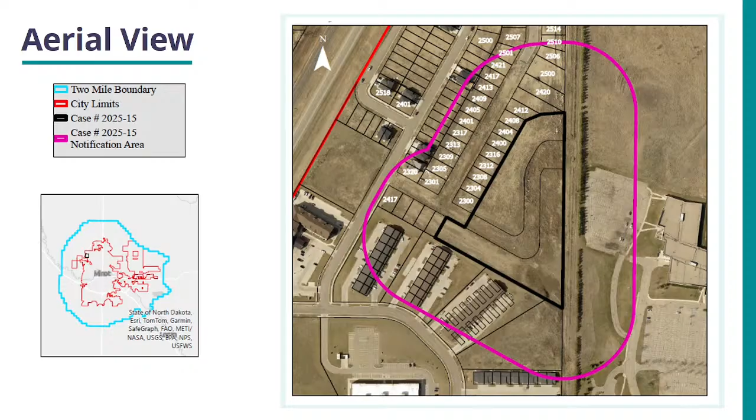Chairman Offerdahl, members of the Planning Commission. As you can see here, we have the property bound in black with the 300-foot notification buffer shown in pink. The subject property is located northwest Minot, west of the North High School. They are requesting an amendment to the PUD plan. The letter of intent can be found in the staff's written report. The proposed layout changes density to single-family homes, and they are requesting the lot alignment amendment to the PUD, as you can see on this map.

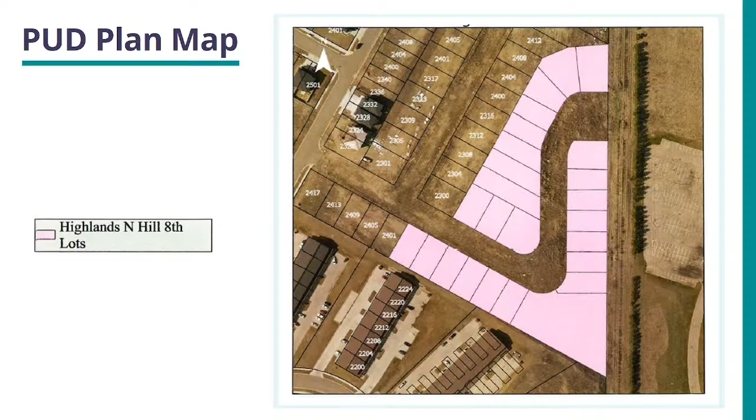The current zoning of the property is R2, two-family residential, with a PUD overlay. Any future development would have to conform to the amended PUD plan. The subject property is designated as urban residential on our future land use map. Adjacent districts are general, commercial, public, and institutional.

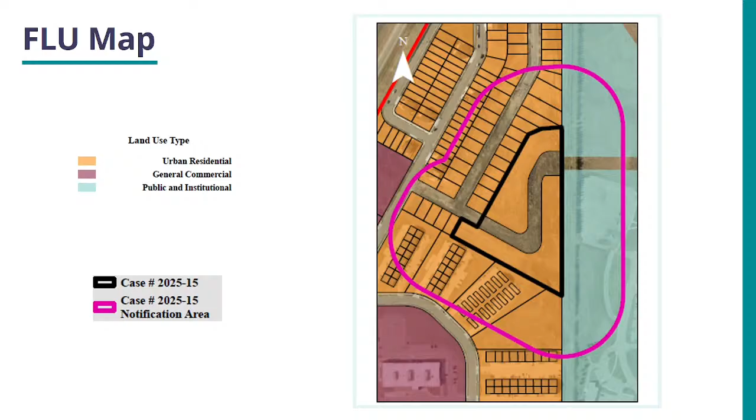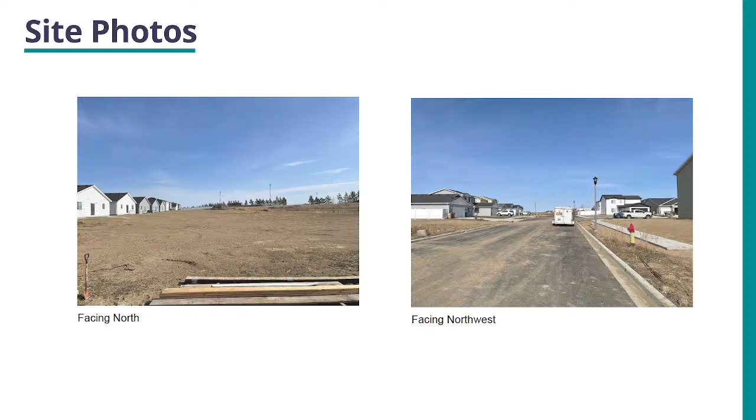Here we have some photos of the property. The one on the left is facing north; these are the vacant lots to be built. The photo on the right is facing northwest, down 23rd Avenue. The photo on the left is facing southwest towards, I believe, their townhome development just to the south, and the photo on the right is facing east towards the new North High School.

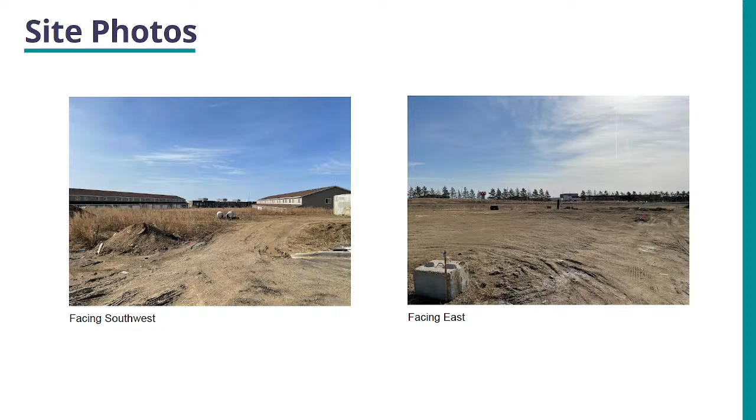Here is staff finding of fact, and it can be found in the staff's written report. Planning Commission has the authority to hear this case and provide a recommendation to City Council on whether to approve the PUD amendment, with or without conditions.

I'd like to let you know that staff recommendations have changed. As you will note in the next application, a portion of it has been withdrawn. Negotiations have been ongoing in this, so staff recommendations tonight do differ from the recommendations you were provided in the staff report. That's because things have changed since the staff report was written.

So staff recommendations as of now are: staff recommends Planning Commission adopt the staff finding of fact and recommend approval to the City Council for an amendment to the PUD overlay planned unit development plan on file at the city, as outlined in Exhibit 3 alternative. That is the sheet that John Van Dyke passed out prior to the meeting. Included in this recommendation is for the City Council to direct engineering to work with the developer to facilitate a reduction in street width by a minimum of 3 feet.

So if you take a look at that alternative, what it outlines is the changes to the PUD that would allow them to go forward with construction of the multi-use path and then be a pilot for a program that would look at street width reductions within subdivisions. So they'd build a narrower road and then have additional pedestrian infrastructure.

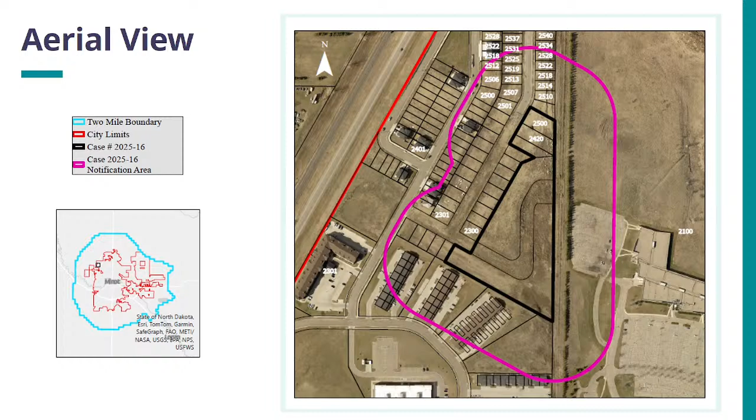As you can see, the subject property is bound in black. It's important to note that the 3 lots to the north would no longer be considered part of this application, as they were tied to the easement vacation, and that application has been withdrawn. So at this point, we're just looking at a preliminary plat for the 2 large lots with unassigned addresses. You can also see the 300-foot notification boundary in pink.

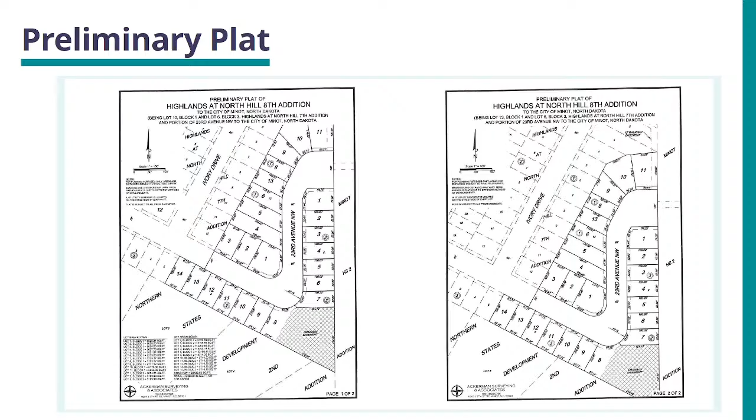Here is the preliminary plat for Highlands at North Hill 8th Addition. The property is currently zoned R2, two-family residential with a PUD overlay, and the surrounding area is zoned C2 and public.

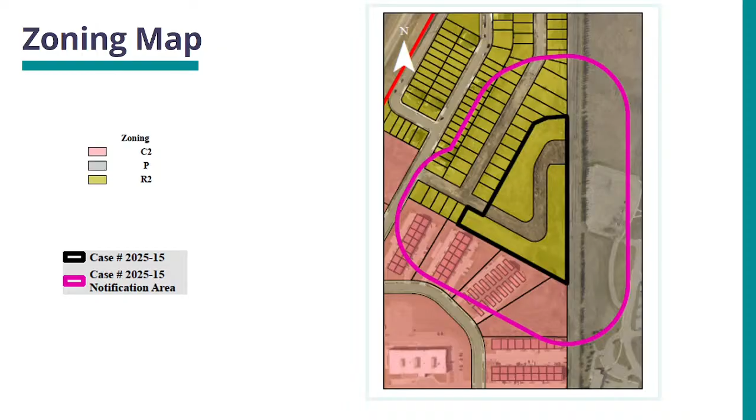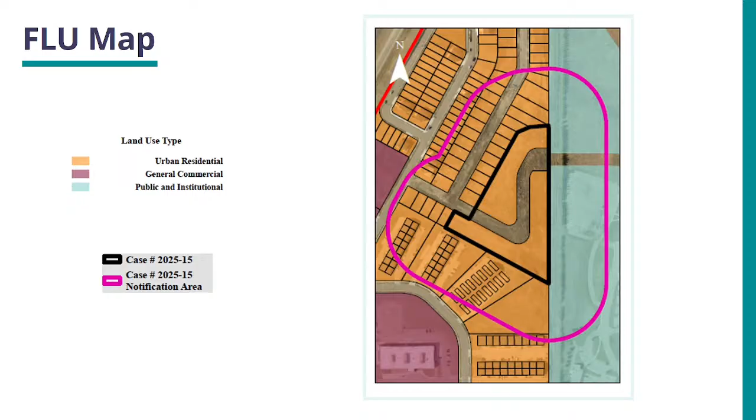Our future land use map classification is urban residential. Adjacent future land use includes urban residential, general commercial, and public and institutional.

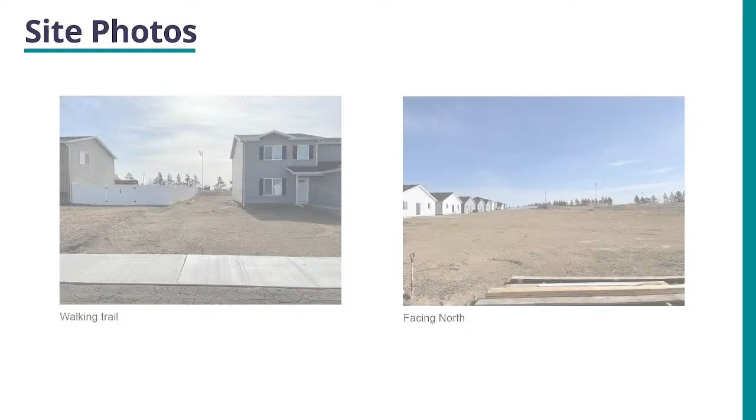The first photo on the left is the area where the pedestrian trail is supposed to be placed between the 2 homes. The one on the right is again facing north, where we're looking at the vacant lots. Again, we see northwest down 23rd and facing southwest towards the townhomes to the south.

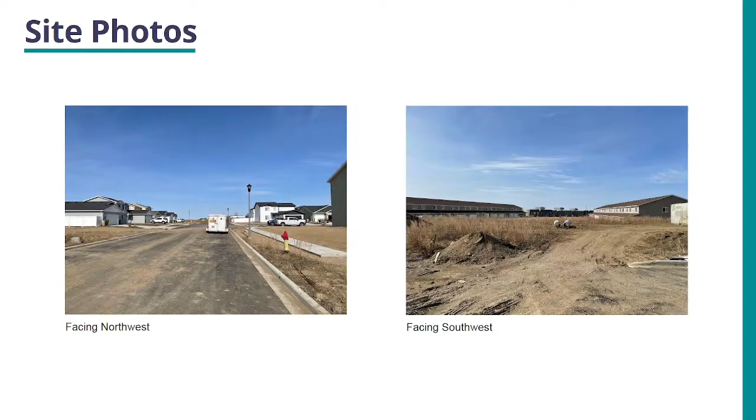Here is staff finding of fact. It can be found in staff's written report. All right, recommendation: staff recommends the Planning Commission adopt staff finding of fact and recommend approval to the City Council

for a major subdivision preliminary plat for Highlands at North Hill 8th Addition as provided in Exhibit 3 with the following conditions: Development shall comply with the previously approved development agreement. Development shall comply with the proposed PUD plan amendment. Development shall comply with the previously approved stormwater management plan. A subdivision infrastructure plan is required. An infrastructure development agreement will be required.

Sewer connection fees at $3,787 an acre, and sidewalks are required. With that, I can stand for questions.

Thank you. Any questions for city staff? Mr. Chairman, Mr. Dietrichson, what are we voting on then? If the easement vacation is not part of it, what are we discussing?

Chairman Offerdahl, Commissioner Kibler, we are looking at a preliminary plat. So these lots don't exist. We're establishing the subdivision lots. Any further discussion for city staff?

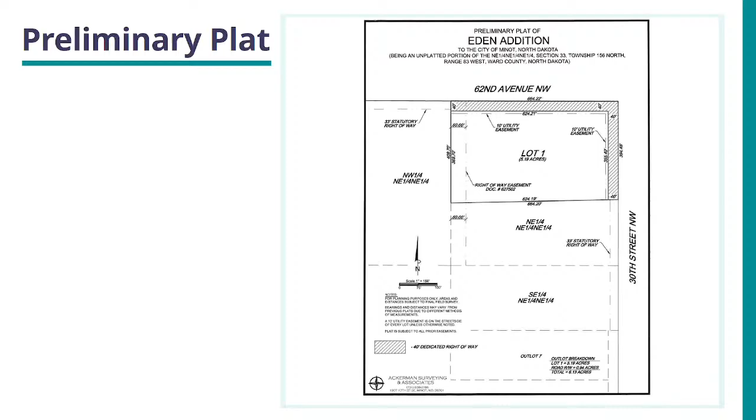Here you can see the preliminary plat. As you can see, we'll end up with a 5.19 acre lot 1 of Eden Addition. Current zoning of the property is ag, with rural residential adjacent. The future land use designation is rural residential, and adjacent districts are rural residential and agricultural.

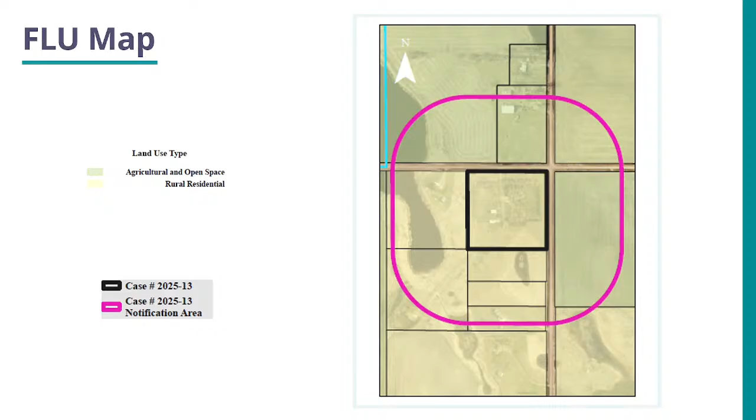Here is staff finding of fact. It can be found in staff's written report. The Planning Commission has the authority to hear this case and provide the City Council with a recommendation as to whether to approve, deny, or approve with conditions. Staff is recommending the Planning Commission adopt staff finding of fact, recommend approval to the City Council for a zoning map amendment from agricultural district to rural residential district without conditions for Eden Addition Lot 1 and the remaining unplatted acreage, and recommend approval of the preliminary plat for Eden Addition without conditions.

Thank you. Any questions for city staff? Mr. Chair, Mr. Diedrichson, just a point of clarification. That blue line indicated that the ETJ zone started to the west of that line and that this subject property is inside the ETJ? Chairman Offerdahl, Commissioner Kibler, yes, this is inside of the ETJ boundary. Inside, yes. And that's our domain, isn't it? For land use authority, okay, yes. Yeah, thank you.

Thank you, Chairman Offerdahl. Commissioners, you can see the subject property outlined in black with the pink being the notification boundary of 300 feet. This subdivision is also one of our platted subdivisions, down by 55th Crossing, just east of Nedrose High School as a landmark. The applicant is seeking a variance due to how these lots were platted back in about 2013. The lots on the east side of this subdivision happen to be 8 feet longer than the lots on the west side. As they built their design starting on the east side moving west, they hit these shorter lots and ran into issues. That's why we're here tonight for a variance.

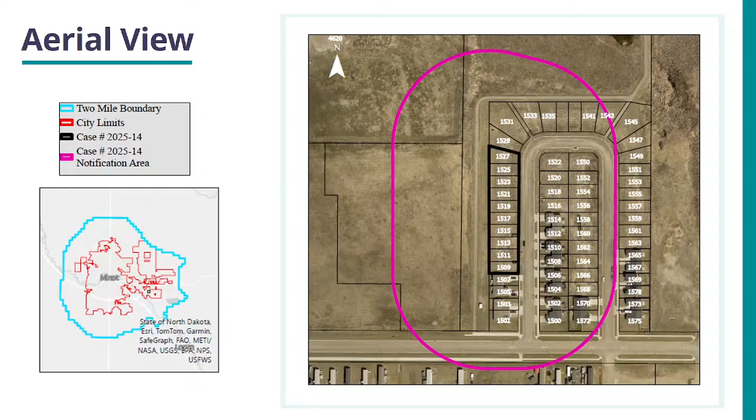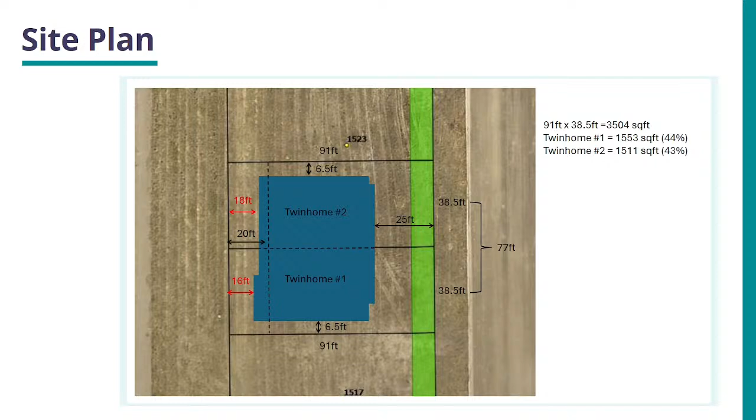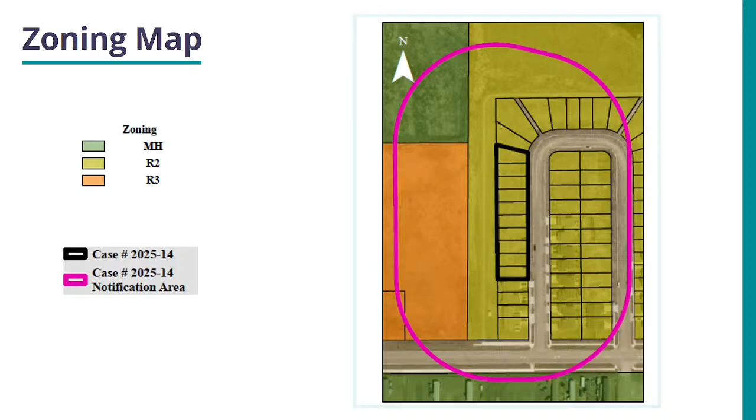The zoning for the property is R2. It is surrounded by more R2, with a walking trail leading to a stormwater detention pond on the west side. There's also R3 and mobile home zoning, with Wheatland Village just to the south. The future land use designates this whole area as suburban residential, with a manufactured home community to the south.

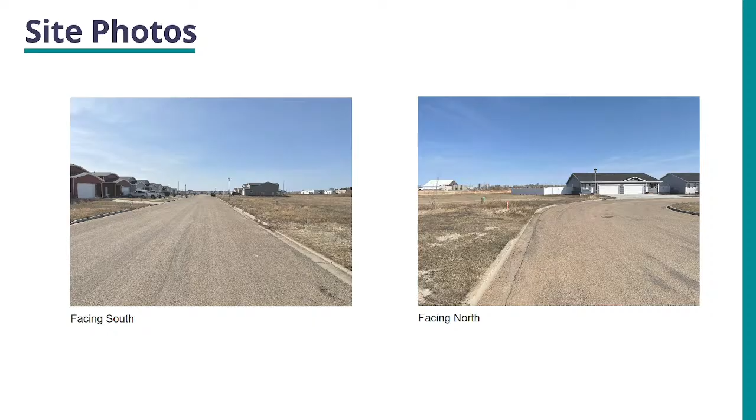This is the findings of fact, which can be found in the staff's written report. Staff is recommending the Planning Commission adopt the staff findings of fact and approve a variance to the rear setback, reducing it from 20 feet to 16 feet, and increase the maximum lot coverage from 40% to 44% for Block 1, lots 4A, 4B, 5A, 5B, 6A, 6B, 7A, 7B, 8A, 8B, 55th Crossing, 3rd addition. With that, I'll stand for questions.

Any questions for city staff? I have one question: did you say that the current homes that are built would not meet the setbacks now? Chairman Offerdahl, Commissioner Amick, yes. The homes built just to the south of this development were built under an old set of ordinances, so while they were allowed then, we can't allow the same today. They would be about 4 feet off the current rear yard setback requirement.

Mr. Chairman, so 4 feet off, meaning 4 feet lower than the required setback? Chairman Offerdahl, Commissioner Kibler, yes. Instead of the 20 feet required, they are hovering around 16 or 15 feet on the rear yards to that back west lot line.